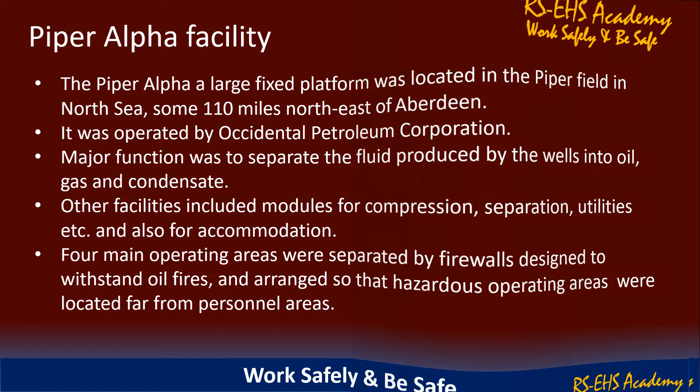Further to the facility, two other platforms were connected to Piper Alpha, along with two flares, a fire and gas detection system, a fire water deluge system, an emergency shutdown system, and an evacuation and escape system.

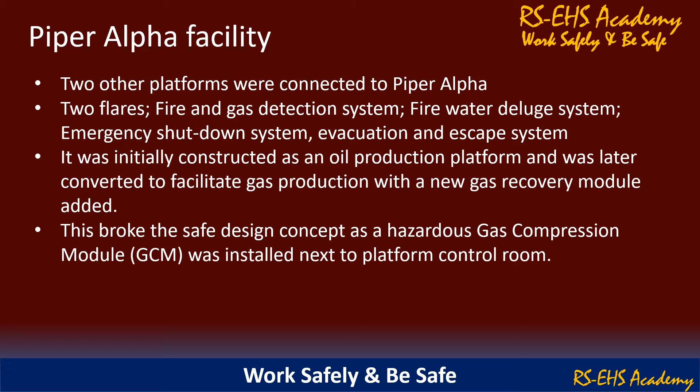It was initially constructed as an oil production platform and was later converted to facilitate gas production with a new gas recovery module added. This broke the safe design concept, as a hazardous gas compression module (GCM) was installed next to the platform control room.

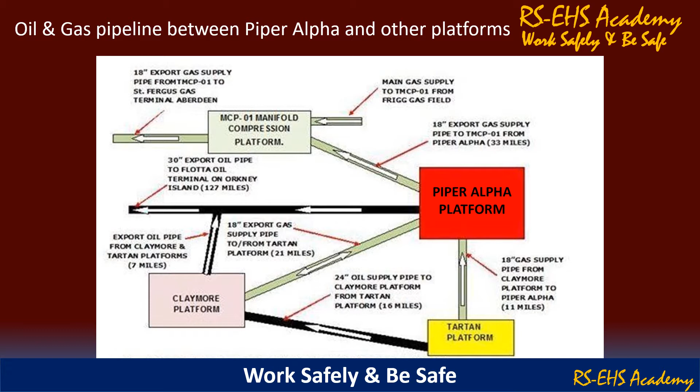Piper Alpha disaster: At 10 p.m. on 6 July 1988, an explosion occurred in the gas compression module.

167 persons died, mostly in the quarters. 62 men escaped, mainly by climbing down knotted ropes or by jumping from a height. Most casualties were because of suffocation caused by carbon monoxide and fumes in the accommodation area.

The total insurance loss was estimated at about $3.4 billion. This is considered the deadliest offshore oil industry disaster.

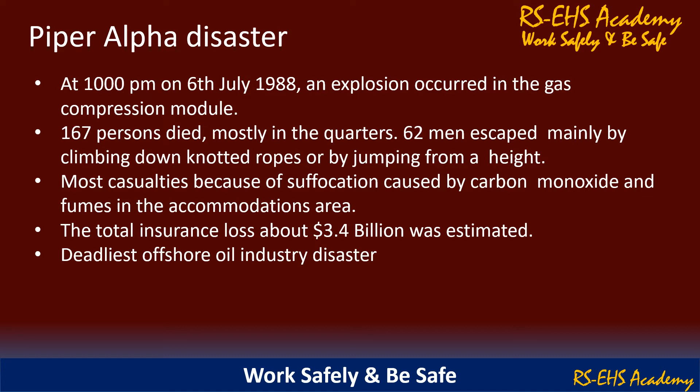Events prior to explosion: there were two pumps for condensate injection to the coast, A and B. Pump B was in operation for condensate injection. Pump A was under maintenance for preventive maintenance, repair of the pump coupling, and rectification of the pressure safety valve (PSV).

The PSV was removed for maintenance and the worker used a blind flange, hand tightened, to seal off the open pipe. Work on the PSV was started, but the work on the pump was not taken up that day.

The PSV was taken off on 6 July morning by a two-man team from the specialist contractor, but it could not be restored by that evening.

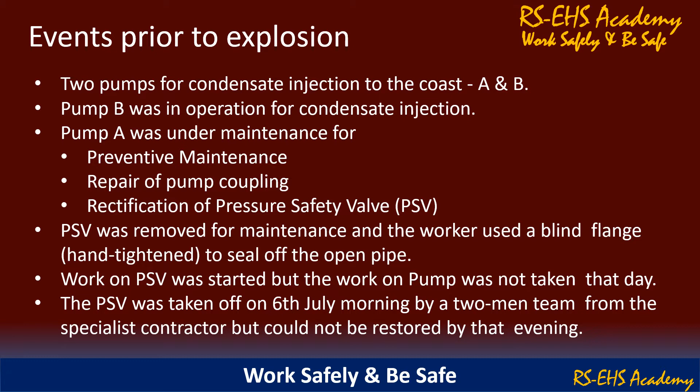Further to the events prior to the explosion: in the evening, the supervisor suspended the permit to work and the team then went off duty, intending to put the PSV back the next day. The supervisor stated on the permit that pump A was not ready for operation and must not be activated. The permit was placed in a box near the valve, as the location-based permit system had outlined.

At about 9:50 p.m., pump B tripped due to hydrate buildup that blocked the GCM and could not be restarted. If the pump was not immediately started, the flash drum level would increase, and within 30 minutes a shutdown of the gas plant had to be taken.

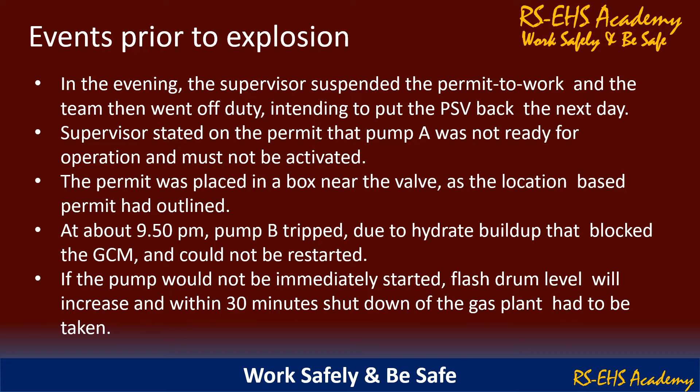Further to the events prior to the explosion, there was a possibility that if the gas supply to the main generator was lost, and if the changeover to the alternative diesel fuel failed, the wells would also have to be shut down. It would then be necessary to undertake a black start.

It was decided to start pump A. Pump A's overhaul permit was found, which was not taken up, but the operator could not find the permit related to its PSV maintenance job. There was no mention of the PSV job during the shift changeover. Believing it was safe to start pump A, the operator activated it at 9:55 p.m.

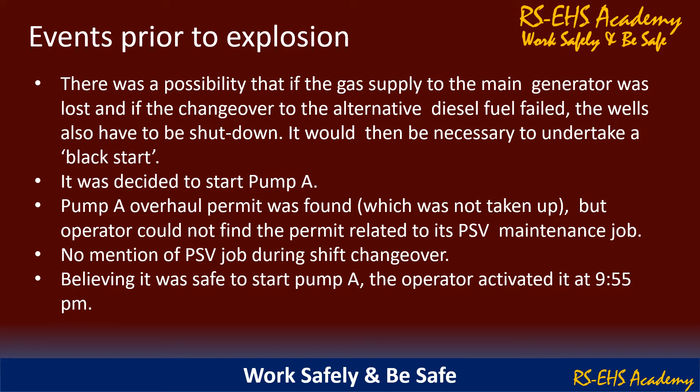High pressure gas leaking through the hand-tightened, failing blind flange whistled and triggered alarms. At about 9:55 p.m., signals for tripping centrifugal compressors came to the control room. Thereafter, a group of alarms came up. The operator had his hand out to cancel the alarms when he was blown across the room by an explosion.

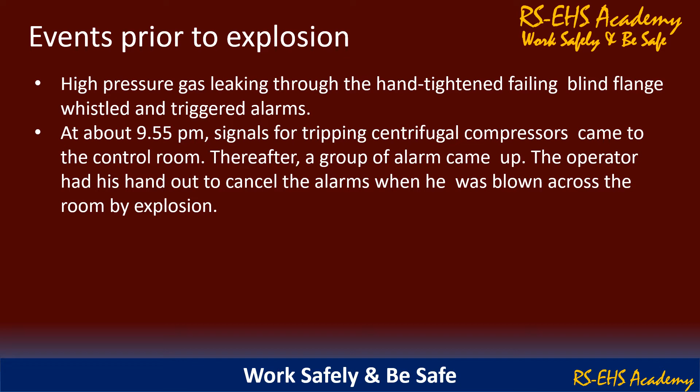The initial explosion occurred at 10 p.m., followed almost immediately by a large fireball and large oil pool fire. The oil pool fire gave rise to a massive smoke plume. The escape routes from the module to the lifeboats were impassable.

The firewater drench system did not operate because it was kept in manual in view of the safety of divers, as there was a possibility of divers getting sucked in due to pump pressure. The explosion disabled the main communication system, which was centered on Piper.

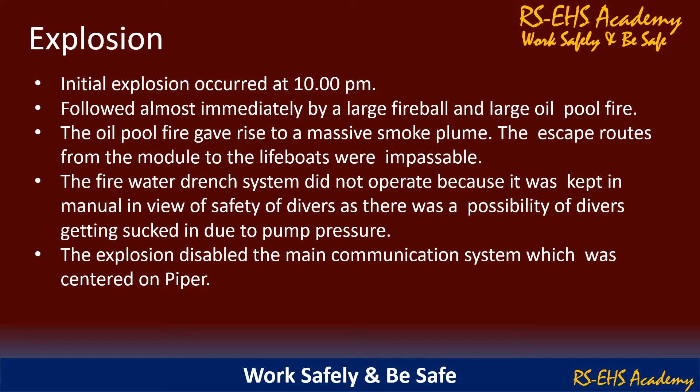Occidental issued no orders to either Tartan or Claymore to shut down, and operators believed they did not have authority to stop export from Piper Alpha, though they could see the Piper burning. So other platforms continued production and pumping of gas for some time, which supplied additional fuel to the fire at Piper. At 10:20 p.m., the Tartan gas line burst, feeding around 33 tons of gas per second into Piper Alpha, which ignited immediately.

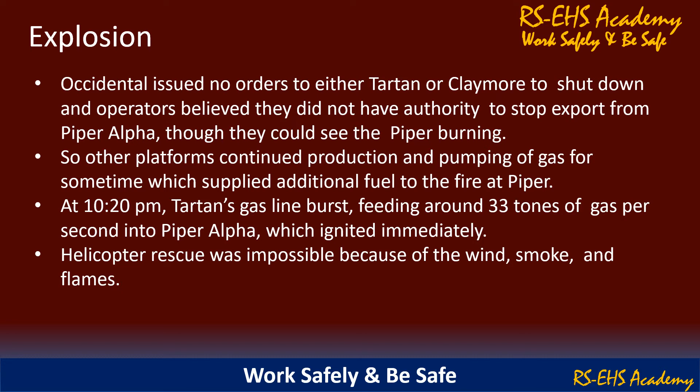Helicopter rescue was impossible because of the wind, smoke, and flames. The Tharos, a firefighting vessel, attempted to draw alongside Piper Alpha and fight the inferno at 10:30 p.m., but was restricted as its water cannons possessed enough pressure to kill platform workers if hit directly.

At 10:50 p.m., a second gas line from the MCP-01 platform ruptured, feeding more gas into the fire. Due to high flames, the steel rig and a portion of the Tharos started melting. At 11:20 p.m., the melting utilities module and crew quarters slid into the sea. The rest of the platform followed piece by piece until 12:45 a.m.

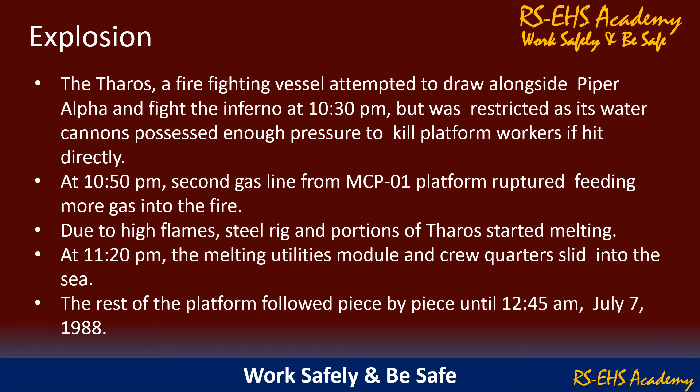July 7, 1988. This was the scene of the platform after the explosion.

Effects of the explosion: the entire deck was destroyed. By the morning of 7 July, only the oil wells module remained standing.

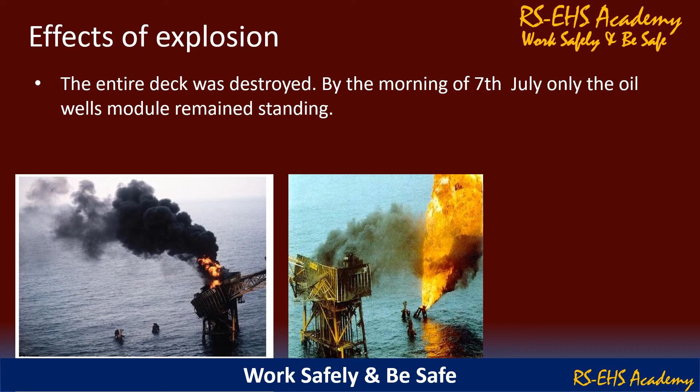This is the overall sequence of events shown in the picture here.

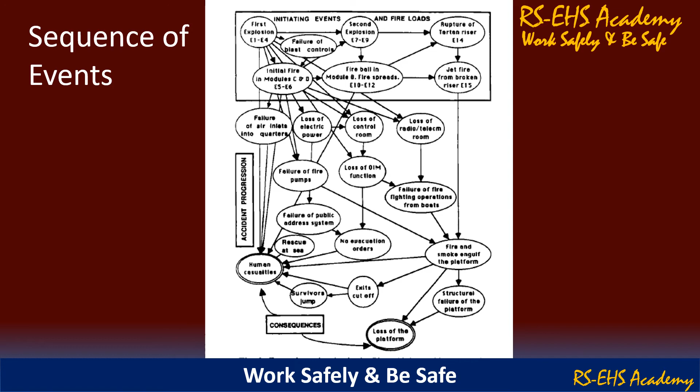Investigation report concludes fuel condensate leaked from the PSV line of pump A, from which the PSV was removed for maintenance. Ignition source could not be identified.

The lead operator who went to start pump A was not aware that its PSV had been removed for maintenance. The contractor supervisor who suspended the permit was on his first job and did not have any training in the operation of the permit to work system. It appears that the production operator also did not inspect the job site.

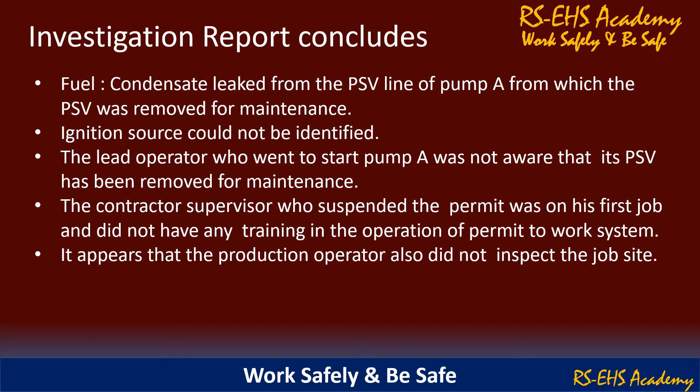Some critical findings: regulatory control is not enough for safety. Defective work permit system and violation of existing code of practice for the work permit system. Positive isolation for maintenance was not followed. Safety audits failed to reveal the weakness of the work permit system.

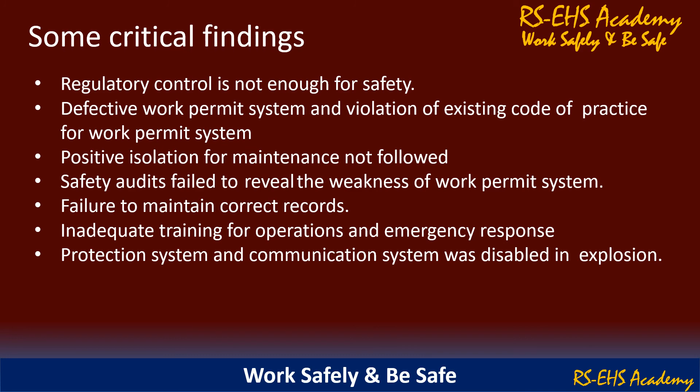Failure to maintain correct records. Inadequate training for operations and emergency response. The protection system and communication system was disabled in the explosion.

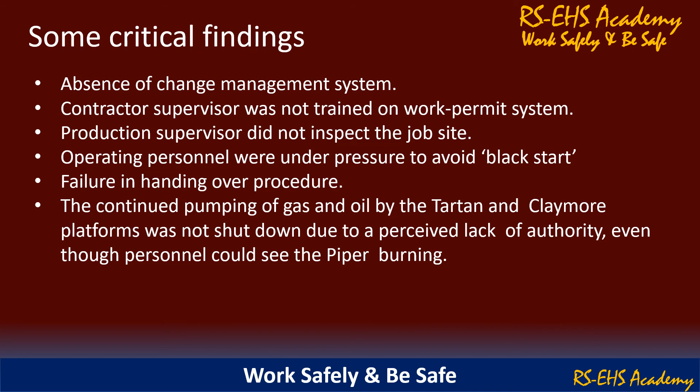Further critical findings: absence of a change management system, the contractor supervisor was not trained on the work permit system, the production supervisor did not inspect the job site, operating personnel were under pressure to avoid a black start, failure in the handover procedure, and the continued pumping of gas and oil by Tartan and Claymore platforms was not shut down due to a perceived lack of authority, even though personnel could see the Piper burning.